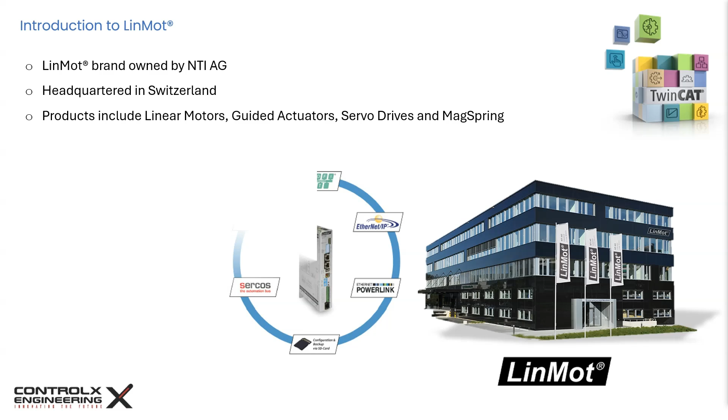LinMot linear motors provide extremely high speed, long life, complete controllability, long strokes, and peak forces up to 600 pounds. LinMot controllers support many connectivity options like analog, digital, serial, CANopen, as well as many industrial fieldbus protocols like Profinet, EtherNet/IP, and EtherCAT, which makes it easy to integrate with most PLCs.

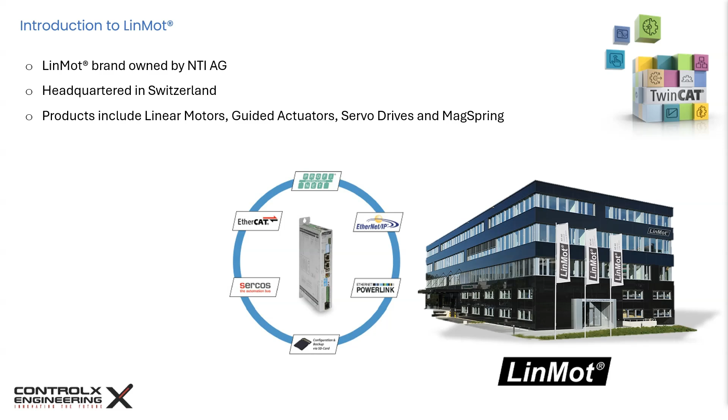For this tutorial today, since we will be integrating with our Beckhoff PLC, we will be using the EtherCAT controller model of the servo. To get started with any device, it is best practice to review the product user manual or installation guide. This page from the user guide shows the typical servo drive connections. This model requires a 72-volt source for the motor supply on connector X1, as well as a 24-volt source for the drive electronics and logic controller on X4.

The linear servo motor connects to X2. This is a three-phase motor and requires UVW and ground connections. The communication cable plugs into the two RJ45 connectors marked X17 and X18. This is where our EtherCAT cable from the Beckhoff IPC will be connected. Since this controller has STO inputs for machine safety, the external safety is wired into X33.

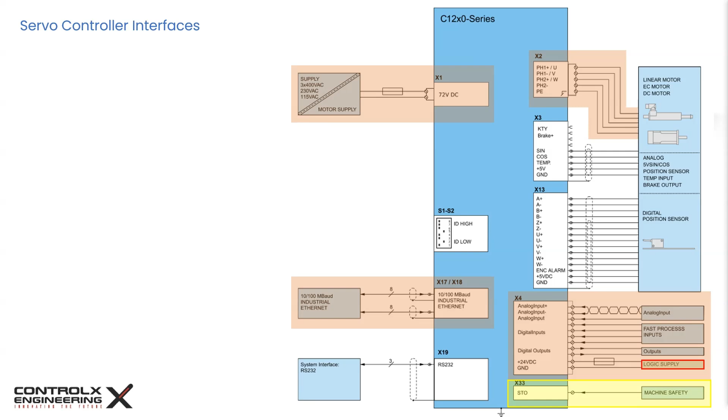This page shows the power supply and grounding connections, as well as the recommended wire sizes. The nominal supply voltage for the motor supply is 72 volts DC, and the possible range for this model is from 24 volts up to 85 volts DC. The power source must be able to supply at least 6.5 amps. This can come from a battery or an AC to DC power supply. Similarly, the nominal power supply for the logic supply is 24 volts DC, and the power source must be within the range of 22 to 26 volts DC.

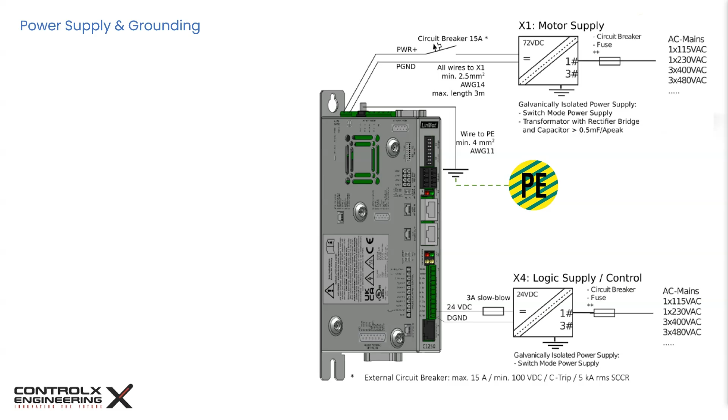To ensure safe operation, it is a good practice to ensure all system components are well grounded to protective earth or PE. This means that the LinMot servo and all control system components must be connected to the same ground.

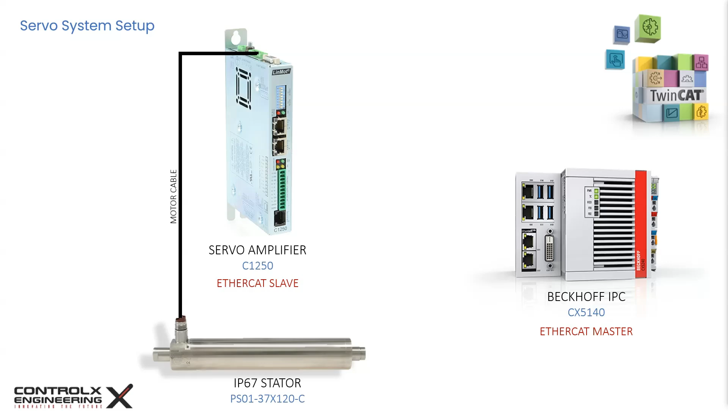Let's set up the controller with the Beckhoff PLC. For this tutorial, I'll be using my CX5140 IPC, which will be our EtherCAT master. The LinMot C1250 will be the EtherCAT slave, and this will be the linear motor that I'll be using today. And these are the rest of the connections that are required to run this servo.

Before we can learn how to integrate the LinMot servo into TwinCAT, we need to understand the concept of the ESI file. ESI stands for EtherCAT Slave Information and is a file that provides crucial information about the slave device to the master. It contains information about the device's object dictionary, which helps the EtherCAT master format commands and display the data correctly, since it contains the indexes, sizes, data types, and descriptions for each object defined in the file.

ESI files are crucial for configuring and identifying EtherCAT devices within the network, ensuring proper communication and data exchange between the controller and the slave devices.

The TwinCAT EtherCAT master needs the device description files for the devices to be used in order to generate the configuration in online or offline mode. The device descriptions are contained in the ESI files in XML format. These files can be requested from the device manufacturer and are made available for download.

This is the I/O node in TwinCAT Solution Explorer. From here, we can manually add or automatically scan the physically connected hardware like I/O terminals, couplers, drives, etc. If the EtherCAT configuration is created online through scanning of a physically connected EtherCAT device and no corresponding ESI description file is available for the slave device, the system manager will ask, via a dialog box, whether the description stored in the device's EEPROM should be used. The system manager needs this information for setting up the cyclic and acyclic communication with the slave device correctly.

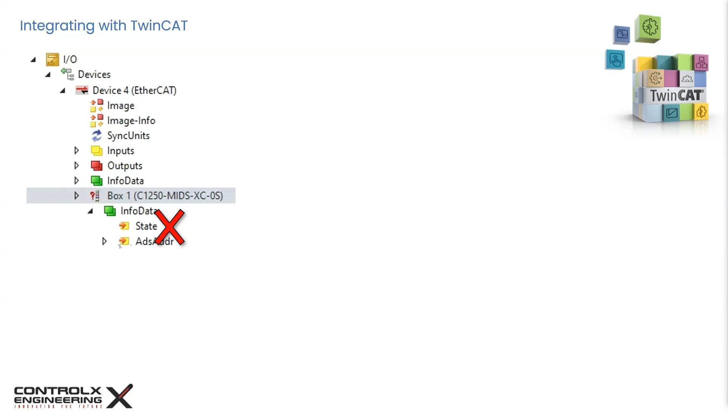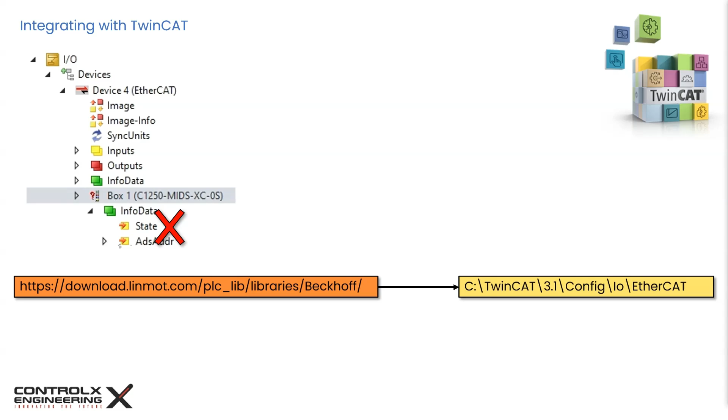If the XAE is already open and the ESI file is then copied in the TwinCAT folder, then the device descriptions have to be manually reloaded by clicking on the TwinCAT menu item and selecting EtherCAT devices, then reload device descriptions. After the ESI file has been copied to the specified folder, we can remove the device and repeat the configuration by performing a scan again.

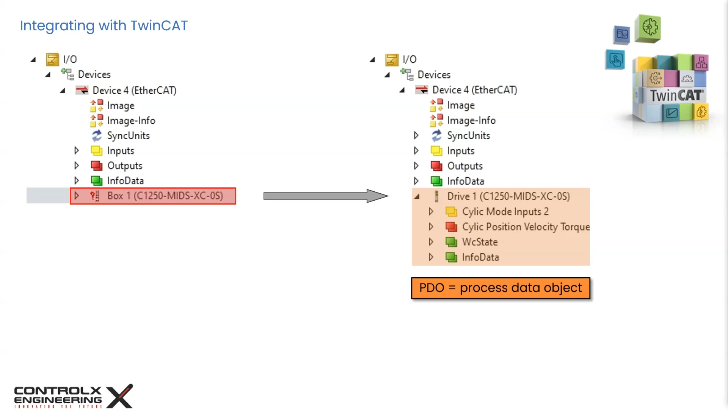As we can see, this time TwinCAT recognizes the device and designates it with the label drive instead of box. It also uses the information in the ESI to populate the transmit and receive PDOs, or process data objects, that will be used for monitoring and controlling the drive. In addition, since TwinCAT recognizes the slave device as a drive, it is now asking whether the drive should be appended to the motion node in NC or CNC configuration. For our application, we'll select NC configuration and click OK.

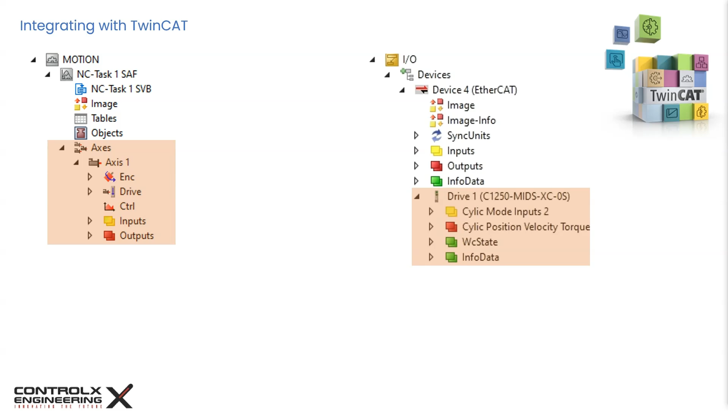The new LinMot drive is now appended to the motion node as an NC axis and automatically labeled as axis 1, since this is the first axis we added to the configuration. Let's double click on the new axis and check out the settings tab. We can see that axis 1 is automatically linked to drive 1 in the IO section. Our LinMot servo is now set up to work with TwinCAT. By linking it to a referenced axis, we can have full control of the axis programmatically from the PLC.

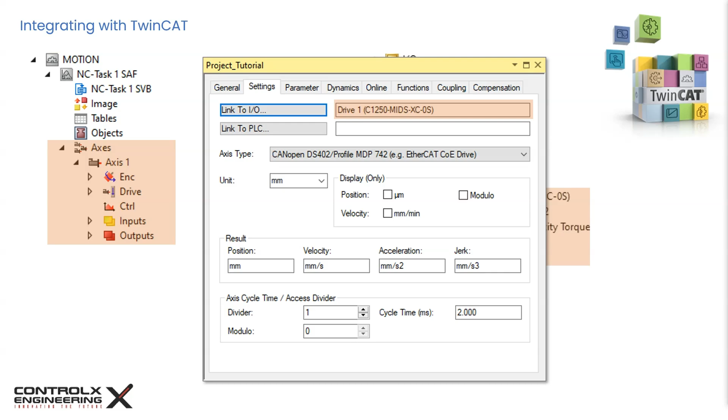Now that we understand the process, let's hop onto TwinCAT and Andrew will walk us through the integration process. Off to you, Andrew. Hi, this is Andrew, and today I will be demonstrating how to integrate a third-party EtherCAT servo drive from LinMot into our TwinCAT project. This will be an exciting video, so let's jump right into it.

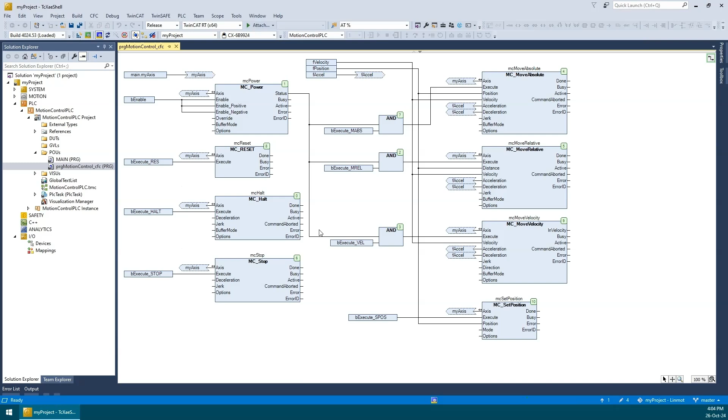Since this is a motion control tutorial, I have opened our training project from our previous motion control tutorial. It has all the necessary function blocks that will be required to move the axis in position mode. We had set up all the functionality in a CFC program. We had also created an HMI to help test the motion controls.

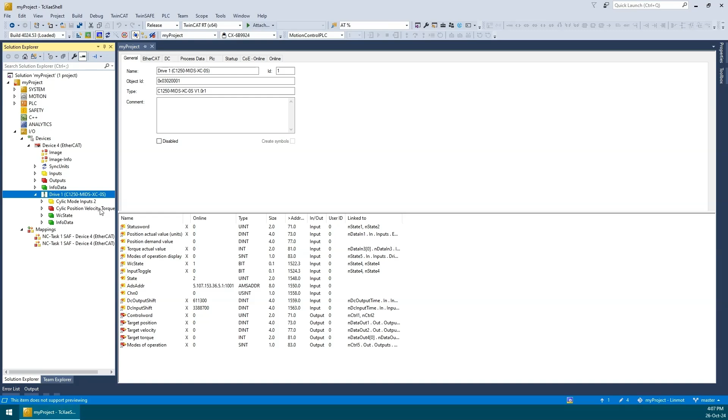Now we can see all the transmit and receive PDOs for this drive. If we expand the drive, it shows them organized into input and output categories characterized by the yellow and red icons. Looking at the motion node, we can see a new axis called Axis 1 has been added, and it has also been linked automatically to Drive 1 in the I/O section.

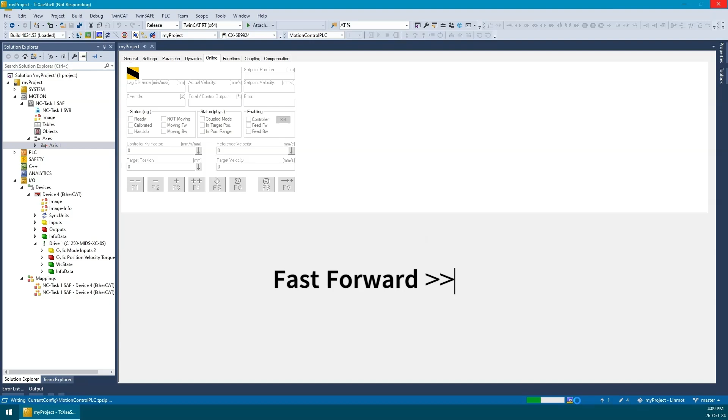I'll go ahead and activate our configuration. Hit OK to put the PLC into run mode. And we're all set. Looks like I'm getting some position feedback from the servo. This servo has an incremental encoder, so it does not give absolute position. On power up, it will report the current position as 0. Therefore, we will need to physically move the actuator position to the desired home position and then zero the position manually.

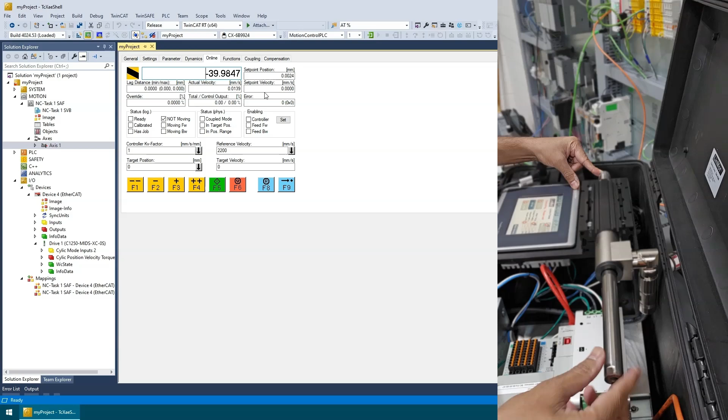This will be my home position, so I will set this position as 0. Now I will move the actuator to the other extreme end and note the feedback position. Looks like the total travel is 172.8 millimeters. Let's enable the controller and try some manual move commands. We can hear the humming of the servo as it is trying to hold the current position, now that it is enabled. Let's give it a target velocity and ask it to go to 0 position.

Okay, that's good. Let's try 170. We're back at position 170. Let's head over to the Functions tab and try some built-in motion profiles. Let's try the reversing sequence.

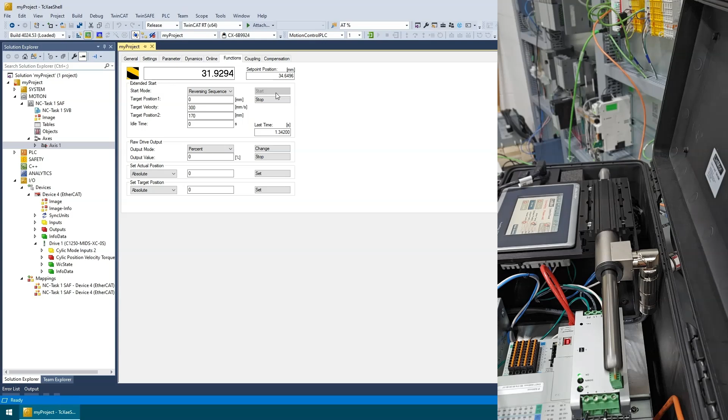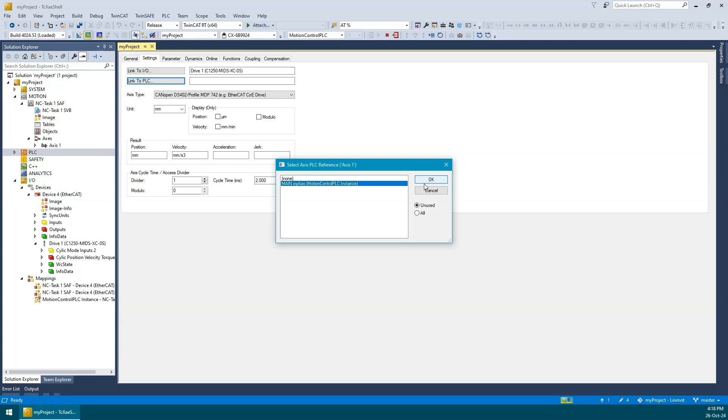That was fun. Now let's get serious and control the actuator from the PLC. But first I'm going to remove the controller enables. Let's head over to the Settings tab. Notice that we have not linked this axis to the PLC yet. So let's go ahead and do that. Now we can activate the configuration. Okay, new configuration has been activated and PLC is in run mode.

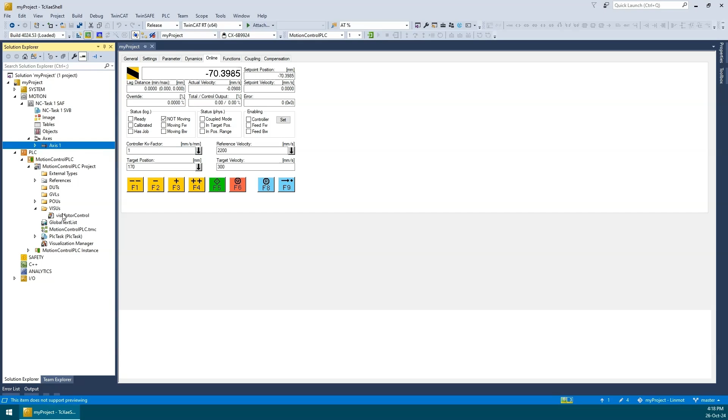Let's go back to the PLC project and open the HMI from the visualization folder. I'll pin the NC and HMI pages side by side, and now we can go online with the PLC. Let's enable the axis and try some move commands from the HMI. We can see from the NC page that the axis is fully enabled. Okay, let's have some fun.

Well, that's all for this demo. We successfully linked a third-party EtherCAT slave device from LinMot and integrated it into our TwinCAT project.